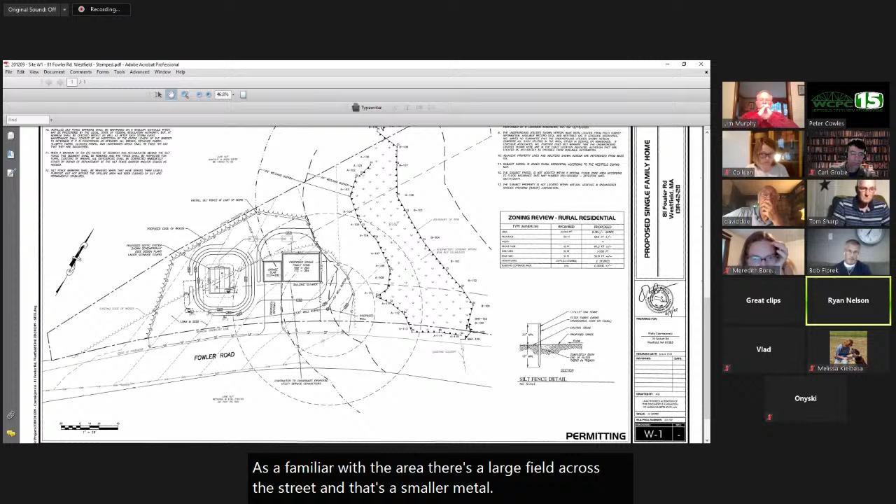This property is located north of Fowler Road. You guys are familiar with the area. There's a large field across the street and a smaller meadow, with this existing tree line shown here. They own a much larger parcel that continues on up to the east. There is a bordering vegetated wetland located on the property, with the boundary located here. There's an intermittent stream within this wetland that flows southerly and crosses Fowler Road.

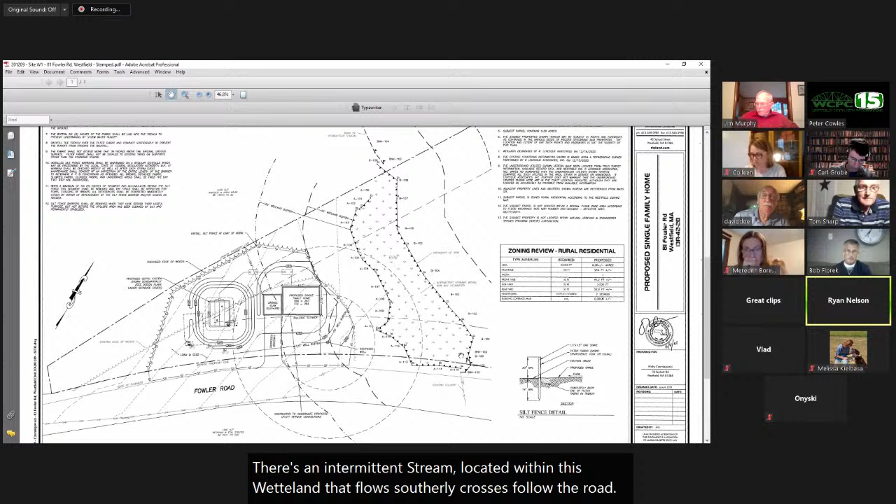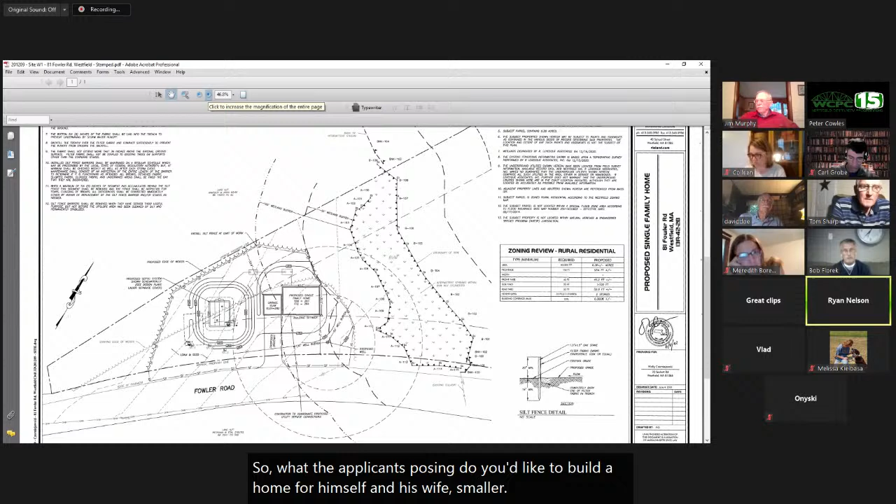The intermittent stream within the BVW hasn't been delineated, just not necessary in terms of buffer zones. Here is the 100-foot buffer zone shown extending from the wetlands. As I mentioned, this is the existing edge of the field. The applicant is proposing to build a home for himself and his wife, a smaller retirement home. The house will be located within this existing field. Due to groundwater and design constraints for setbacks for new construction of a septic system, it will be a pump septic system located here. There's going to be a driveway.

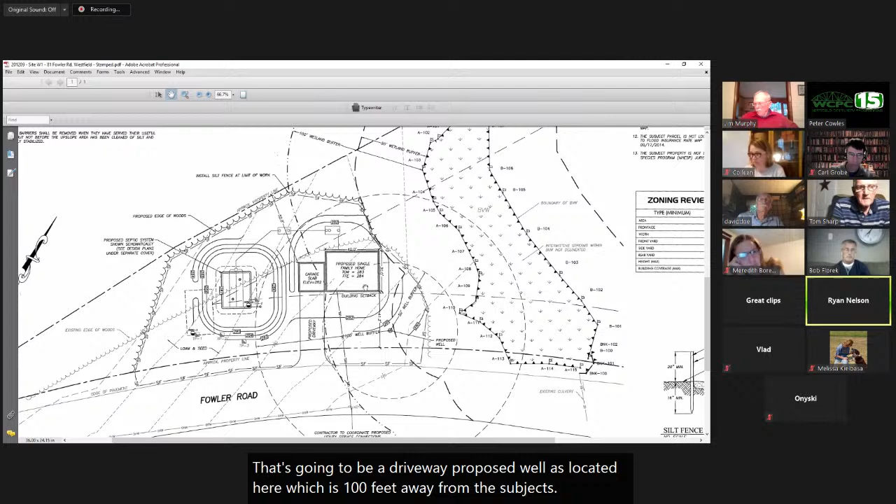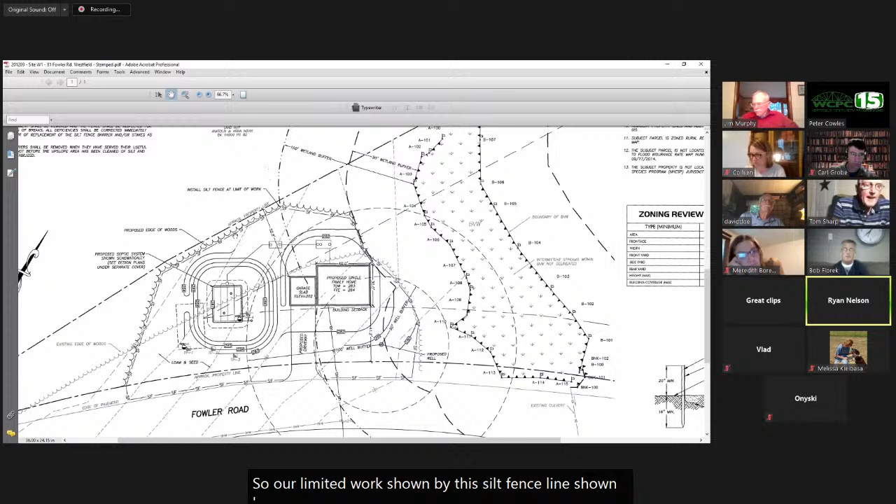The proposed well is located here, which is 100 feet away from the septic system. We are staying outside the 50-foot buffer zone, with the exception of an existing portion of the field here, which really won't be all that disturbed, just a little bit of site grading. In terms of clearing of vegetation, no work will take place within the 50-foot buffer zone. Our limit of work is shown by this silt fence line, which will encompass the project site.

Aside from that, it's a pretty simple layout, a small project, less than a quarter of an acre. We did have some comments from DEP. I can bring those up in one second.

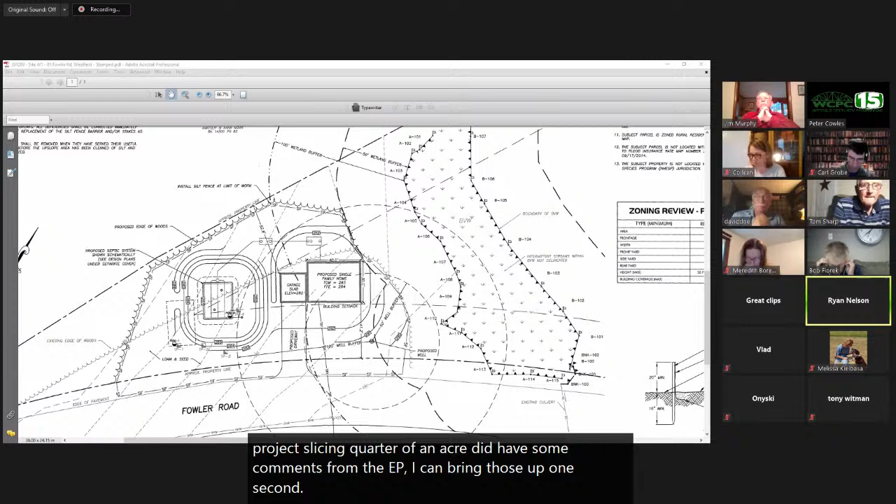We received comments from Mass DEP on June 15th for the project. Mr. Simpson's comment number one — let me share it here. Some aerial photos suggest the area southwest of the tree line is somewhat wet and tire ruts are seen, which may or may not constitute BVW. Is there a cross culvert under Fowler Road between this parcel and parcel 13R-45? The commission may certainly require wetland data sheets being included in any NOI application.

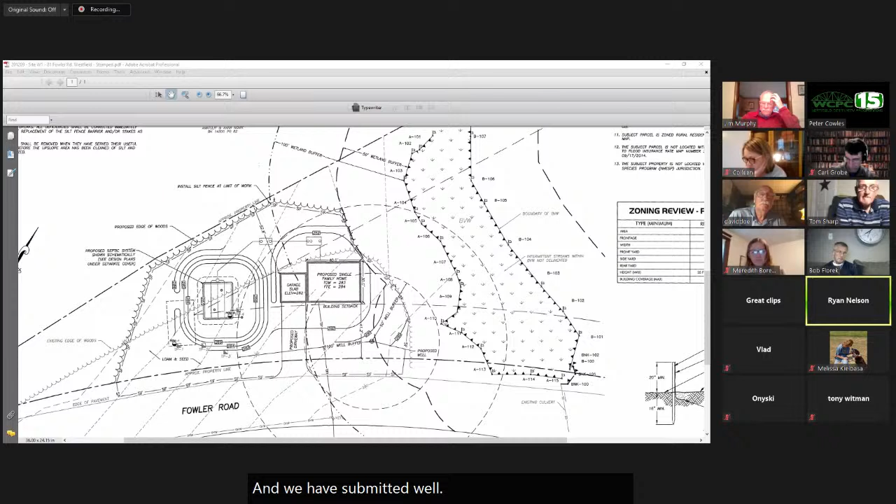So I kind of have an idea of where he's referring to. On aerial imagery, it looks like there's maybe a wet signature in this corner of the field. I did look at it — there's some sensitive fern there, but I didn't find hydric soils that would constitute it as a BVW. It's been a maintained hayfield for quite a few years, and we have submitted wetland determination data forms to the commission since his comment, which have supported that.

Ryan, when did you delineate? I delineated the property back in December of 2020, but I was out there again this spring during the perc testing, and I took a look at everything during full vegetated conditions, and everything remains the same.

The second comment from DEP was, according to MassGIS data, this parcel already has a single family home located upon it, and is this a new subdivided parcel not yet recorded?

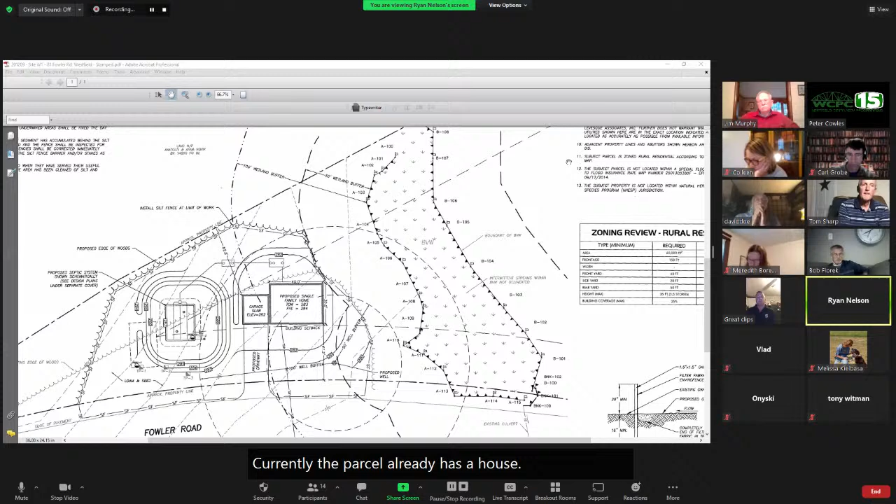So that is correct. Currently the parcel already has a house on it. It's actually the applicant's daughter's. But the intent is to ANR this property pending conservation approval. Didn't want to subdivide the lot before we got through conservation approval. But there's plenty of frontage. We've done a review, and this proposed lot would meet all the dimensional zoning regulations to be a new lot.

So those were the only two comments. I think I've hit upon all the key items. Happy to answer any questions you guys might have. Any questions from the commission?

It doesn't look like there's room for any further agricultural activity. Is that correct? That's correct. Yeah, there'd be no more haying of this field. The buildable area of this envelope is pretty much taken up by the house and the septic system.

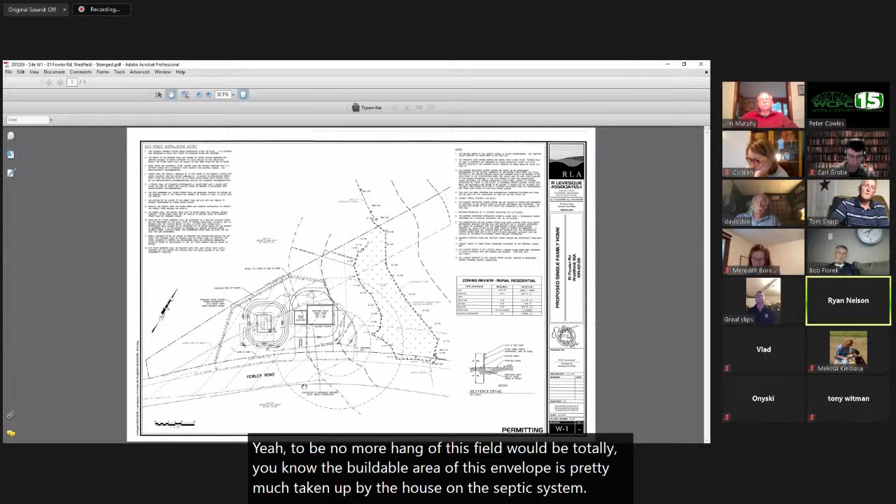Ryan, does the property owner understand that the 50-foot buffer will be a no-touch zone? Yes, yep, I've conveyed that to him.

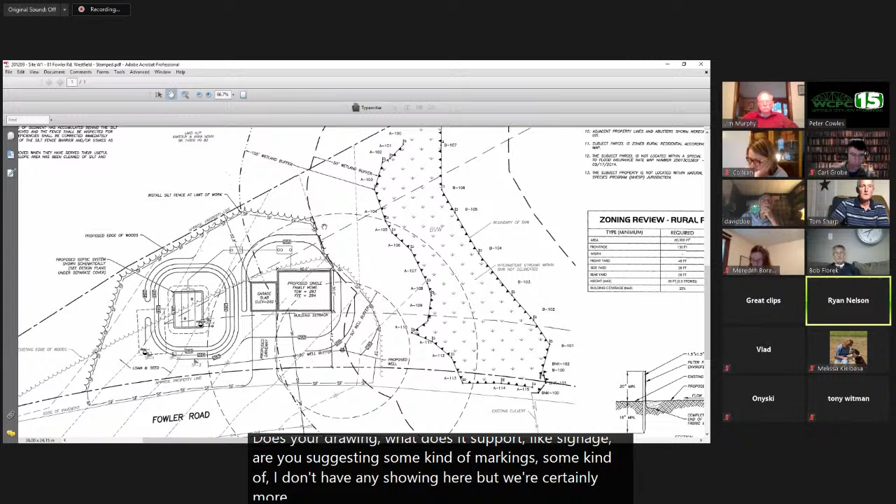Does your drawing support signage? Are you suggesting some kind of markings? I don't have any shown here, but we're certainly more than willing to show that. Yep, that's something we anticipated. I guess I'm absent-minded, I don't know why I didn't show it on the plan here. Okay, thank you.

Other questions? I had a quick question, if I may. Sure. Ryan, where does this proposed house lie relative to the existing house? Is it to the east?

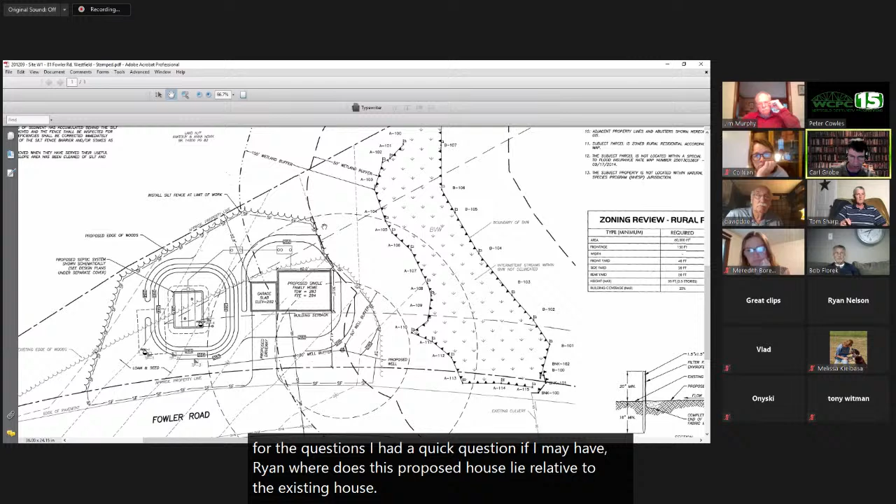Yes, let me pull up a different aerial so you guys can get a look. Ryan, just so you know, we didn't see an aerial you shared before, so I was hoping maybe you could show us. Oh, sure, okay. Yeah, it was just the site plan.

So this is the property right here. So there's an existing house here. In the future, the concept is that a lot line would come down somewhere in the middle here that would segregate the two parcels. And the area Mr. Simpson was referring to, you can see there's a wetland located in here. The culvert actually discharges within this hedgerow.

I took a look at this area here. You can see it's kind of wet, but this is also during the non-growing season in this aerial. I took some soil samples here. I didn't find any hydric soils, some sensitive fern, but there's also sensitive fern spread around the meadow. Mark showed us an aerial of some ruts or matted grass in this area. I can see why there'd be cause for concern, but this past week I did soil sampling all through that area and there's definite upland soils.

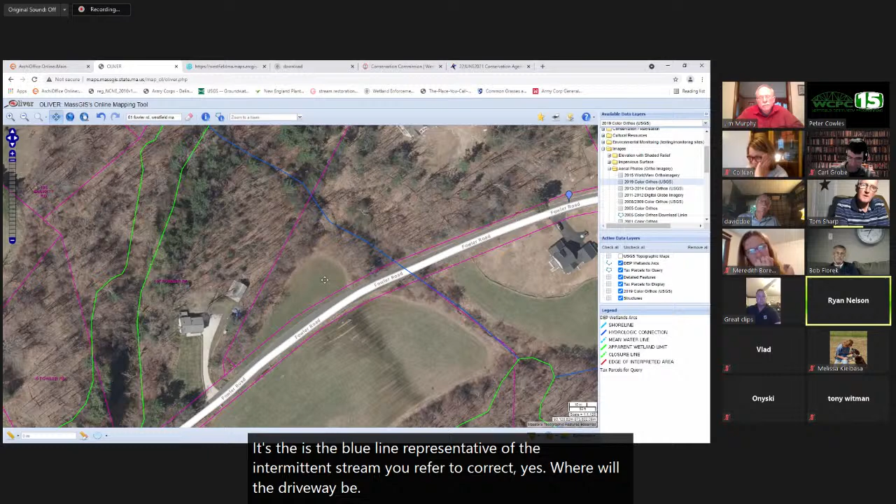Is the blue line representative of the intermittent stream you referred to? Correct, yes. Where will the driveway be? Right here, right about here.

And obviously plenty of frontage, but is there enough acreage? It's hard to tell. Yes. Let's see, I think I have a table here. The minimum lot area is 60,000 square feet, so there's more than enough. We would encompass a lot of this wetland area as part of the future parcel.

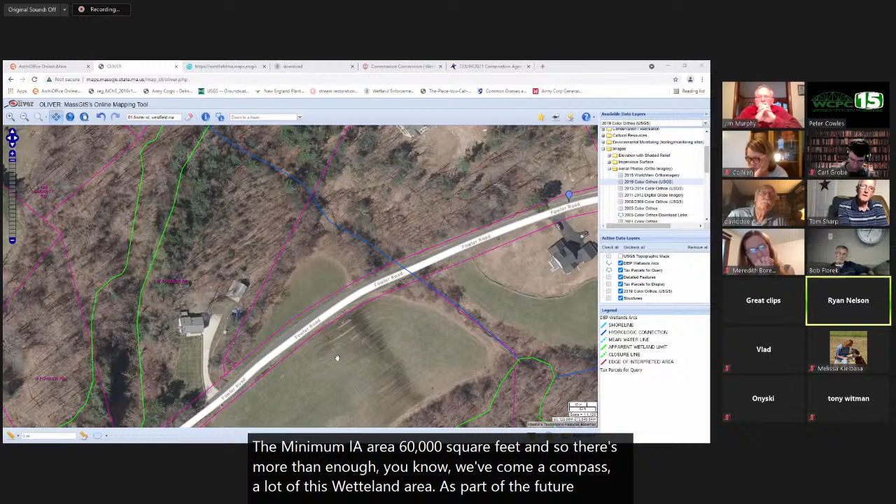Okay, thanks again. Other questions? Ryan, go ahead, Meredith. Oh, I just was wondering if you could, Ryan, show us what trees are going to be removed, sort of the tree line. Yep, sorry, on the aerial photo.

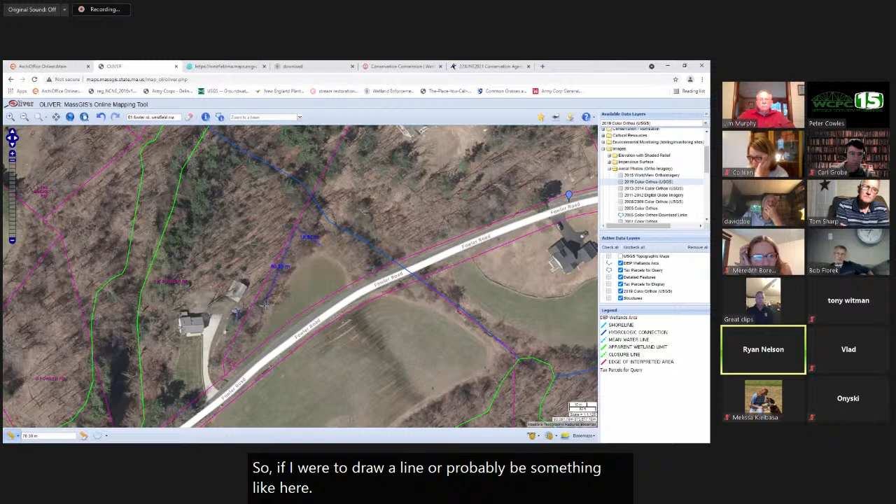So the 50-foot will remain. Maybe if you draw an imaginary line from about here, vegetation on this side of the stream would remain. And from this imaginary line, heading kind of southwest, about half of it would be cut to allow for the septic system and septic tank. So if I was to draw a line, it would probably be something like here to there, that would be cleared, this area here.

Okay, thank you. Yep.

Ryan, on your site map, it looked like the corner of the house was right at the 50-foot line. Is that correct? Let's see. Yep, we're a couple feet off that 50-foot line. But at that location, the house will be relatively on grade, so we're not anticipating any site grading to occur around that corner of the house.

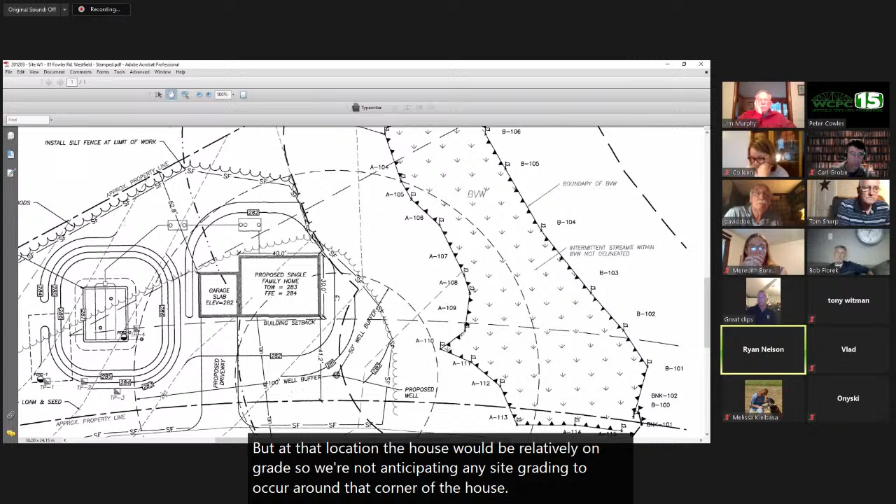So your silt fence is really right on the 50-foot or really close to it? It's a couple feet beyond the 50-foot inside it, but it's staying within the existing meadow in that area. So it's grass now and it will remain grass. Okay, so they're looking to mow it? Yes.

Other questions? Do we need a site visit? Yeah, I had a very quick question if I could, from Ryan. Where's the 100-foot buffer then? Is that the double line there? Yep. Okay, all right.

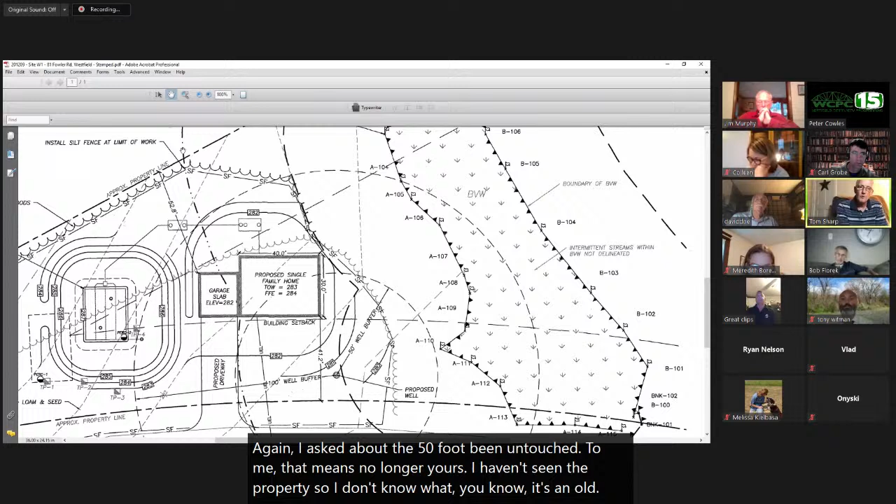Thanks, I was all happy with this until you mentioned mowing. Again, I asked about the 50-foot being untouched. To me, that means no lawnmowers. I haven't seen the property, so I don't know, is it an old cornfield? Is that what you're implying? It's a hayfield, so it's mowed several times a year now. But in the future, it'll be maintained as a pretty lawn with fertilizer and all that good stuff.

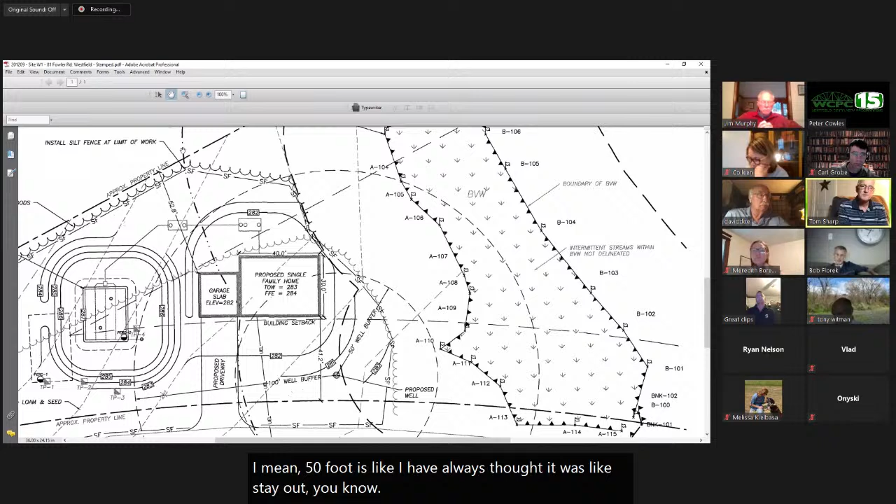Yeah, that's probably true. I'm just trying to think, commissioners, have we done this before? I mean, 50-foot is like, I've always thought it was stay out, especially on something new, especially on a new project like this. I was thinking your signs would go right on the 50-foot marker. Do not disturb, but if the owner is going to be in there with lawnmowers, clearly that will be disturbed. I see what you're saying, Tom. I do, I guess it's a gray area of it's mowed now, and what constitutes, at what point is mowing more detrimental in frequency? I don't know.

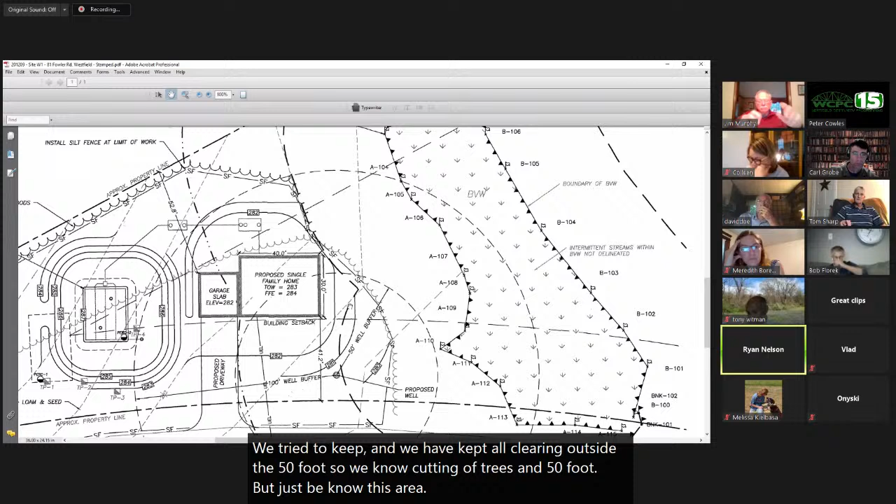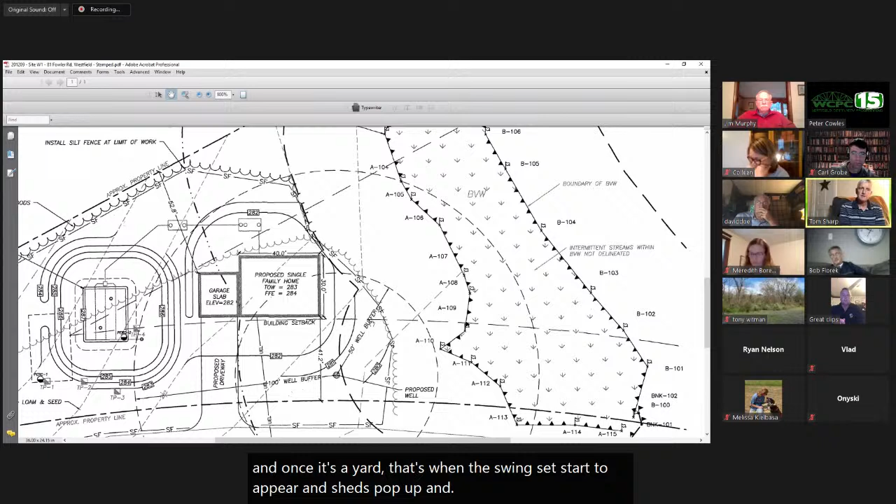We tried to keep, and we have kept, all clearing outside the 50 foot. So there'll be no cutting of trees within the 50 foot. It would just be this area within the wedge between the existing tree line and the 50-foot buffer that would be mowed more frequently. Tom's point is a good one though, in that that was formerly agricultural use, and this is changed to making it a yard. And once it's a yard, that's when swing sets start to appear and sheds pop up. I just think we have to be a little careful with our buffer zone.

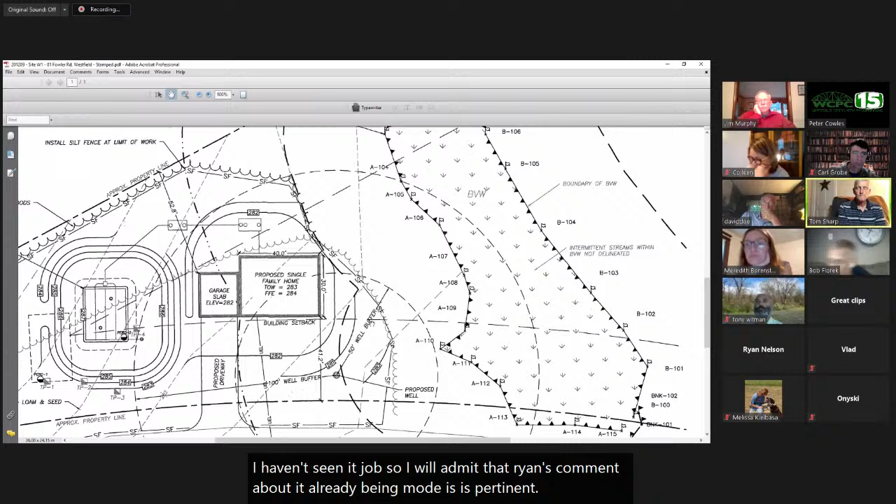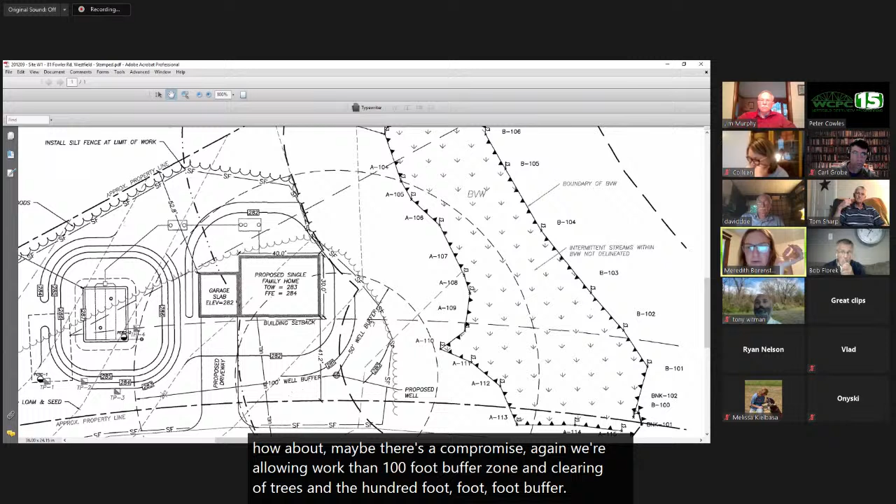Tom, what are you proposing as an alternative? I haven't seen it, Jim. So I will admit that Ryan's comment about it already being mowed is pertinent. I don't know, I'm looking for help here. I'm not sure how. Maybe there's a compromise, like we're allowing work within the 100-foot buffer zone and clearing of trees in the 100-foot buffer zone. Maybe the 50-foot could be marked. And in perpetuity, maybe we could get some plantings. And maybe it doesn't have to be signage because this is going to be somebody's home, but trees.

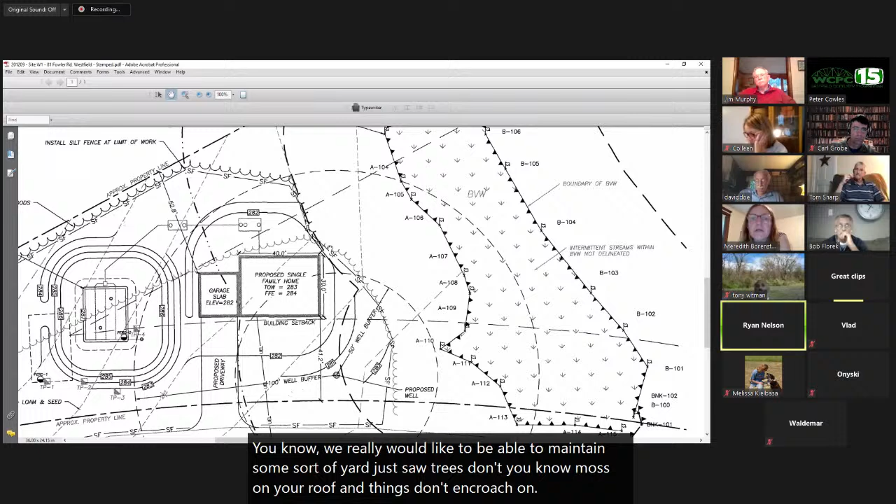Yeah, I think our greatest area of concern is this back corner of the home. We really would like to be able to maintain some sort of yard just so trees don't, you know, moss on your roof and things don't encroach on your house. But we'd certainly be willing to compromise elsewhere if we can think of some ideas. I think a site visit probably is necessary so we can see how close we are to the buffer zone and what the effect of the mowing actually is out there. I agree.

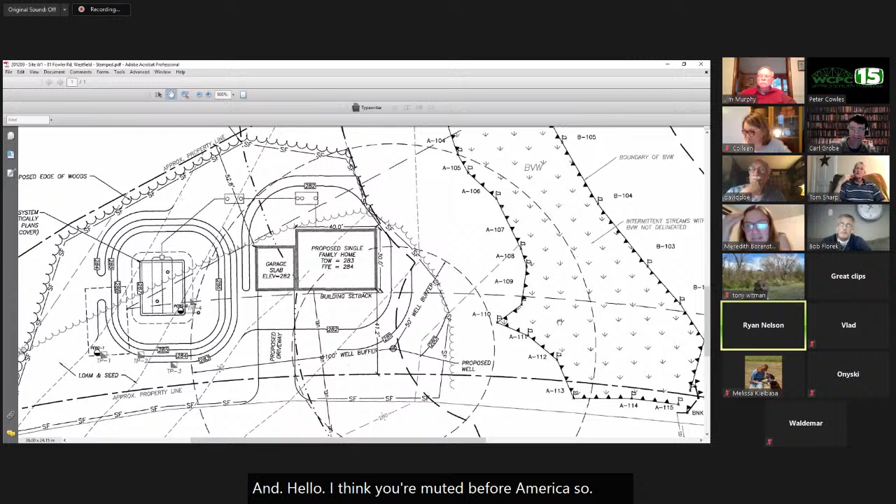Did anyone hear my comment about the cutting of trees long-term? And hello, I think you were muted before, Meredith. Oh. One more question, was RLA able to maximize the field portion of the property and try to locate the work outside of, as much as possible outside of the 100-foot buffer zone?

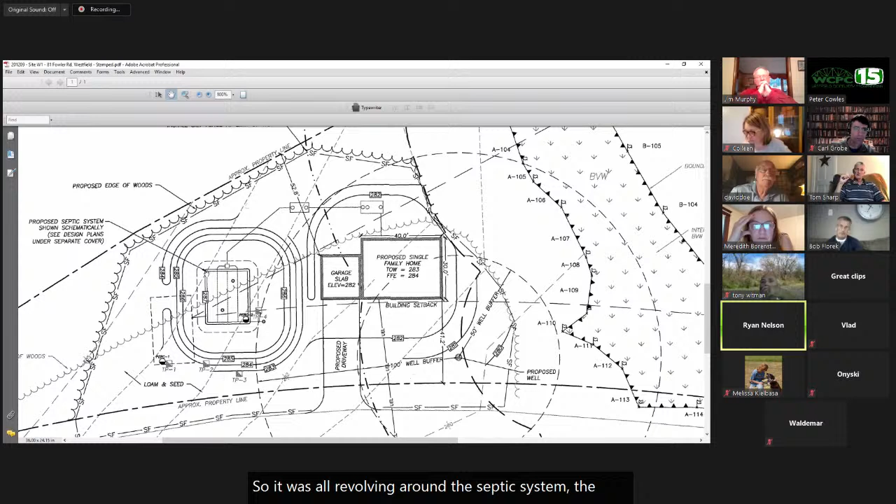Yes, so I'll give you the reasons or the constraints we had. It was all revolving around the septic system. The septic has to be 10 feet from the property line. It's a mounded system, so we had to keep the side slope grading on our property. The well has to be 100 feet from the septic system, and the house is right up against the setback. We couldn't shift the house any more left without encroaching on the septic area.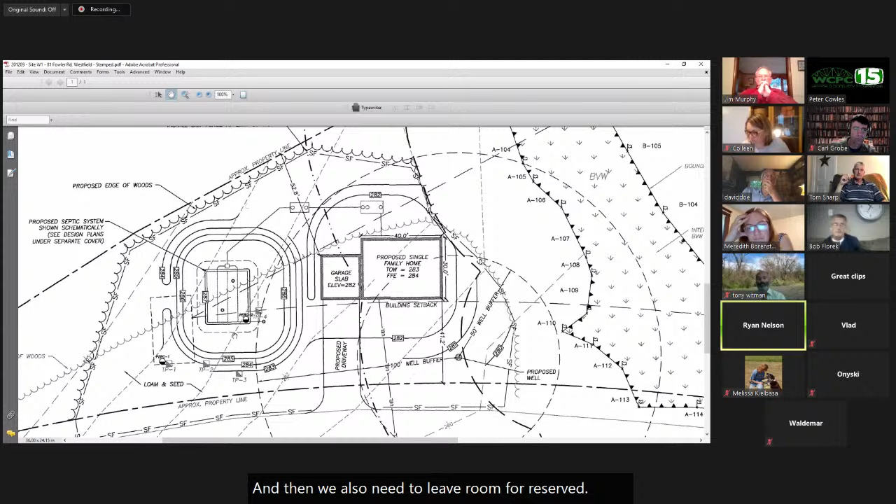And then we also need to leave room for a reserve perk, under Title V, for a future septic system in case this one fails. So we couldn't push everything over to the left because then we wouldn't have room for a perk for a reserve area. You can't have a septic system within the 50-foot buffer zone, which limited us from having a reserve over here. So it had to stay on the upland side. We've shifted everything down to the left as much as we can.

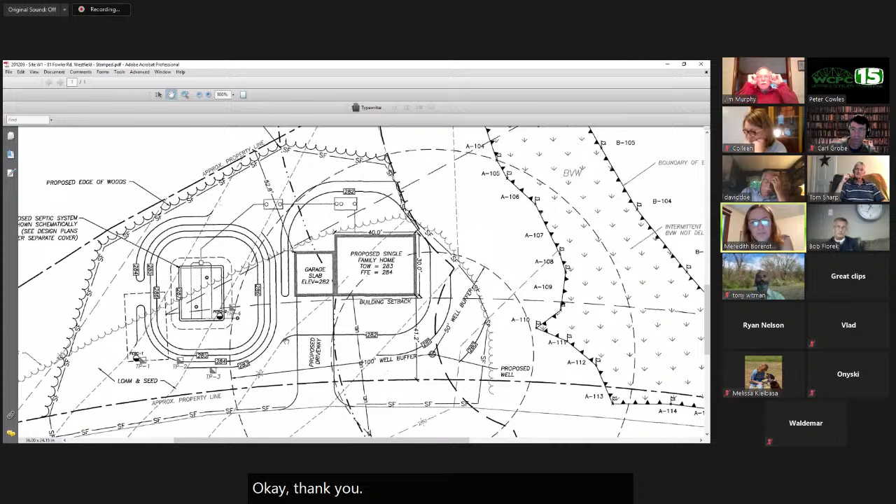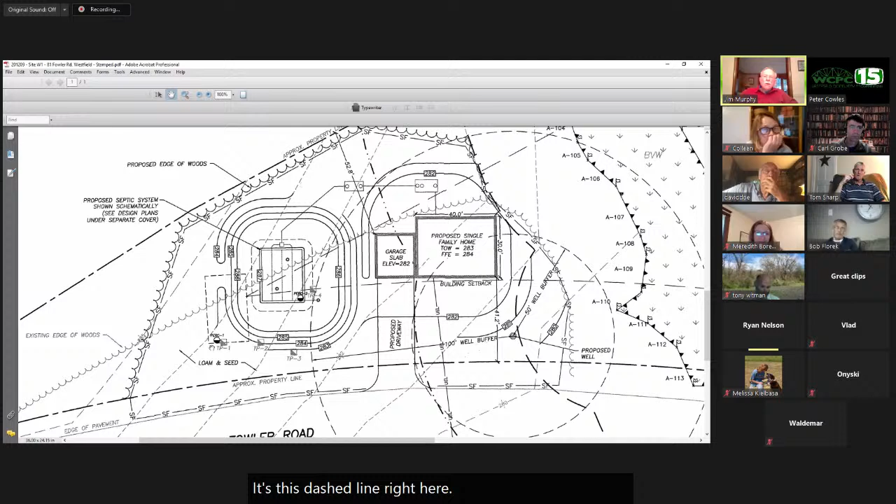Okay, thank you. I have a question for Ryan regarding the reserve. Could you explain a little bit? I'm looking at the primary location, and this is a raised mound, as you said. So where would the reserve go? It's this dashed line right here, just an approximate area. We also have to keep in mind this has to be at least 100 feet away from the neighboring well, which it is, which is why we can't move it any more to the left either.

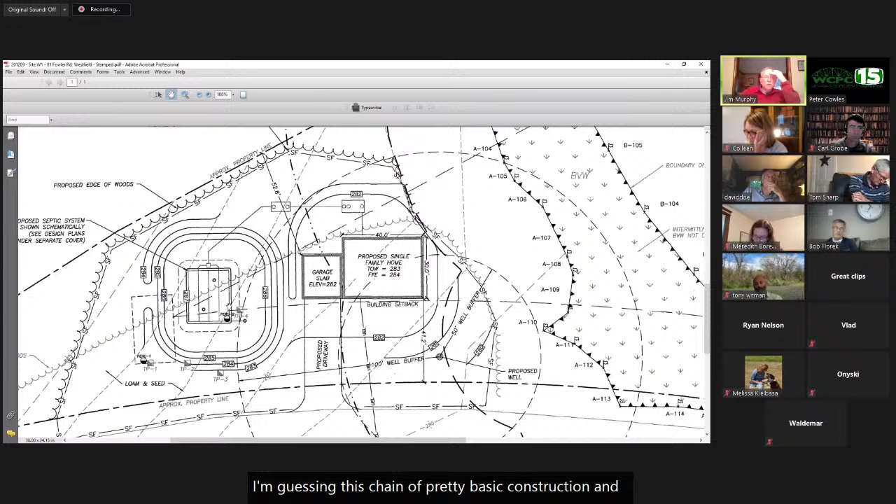So when a reserve has to be done in a mounded system, I'm guessing that's pretty invasive construction-wise, because you've got to change the contour of the mounds. Is that correct? That's correct. This provision is set forth for 40, 50 years long-term down the road. This would probably have to be left in place, abandoned or removed, but you'd have to construct a new one at the proper grade, mounded and elevated around the new reserve perk area.

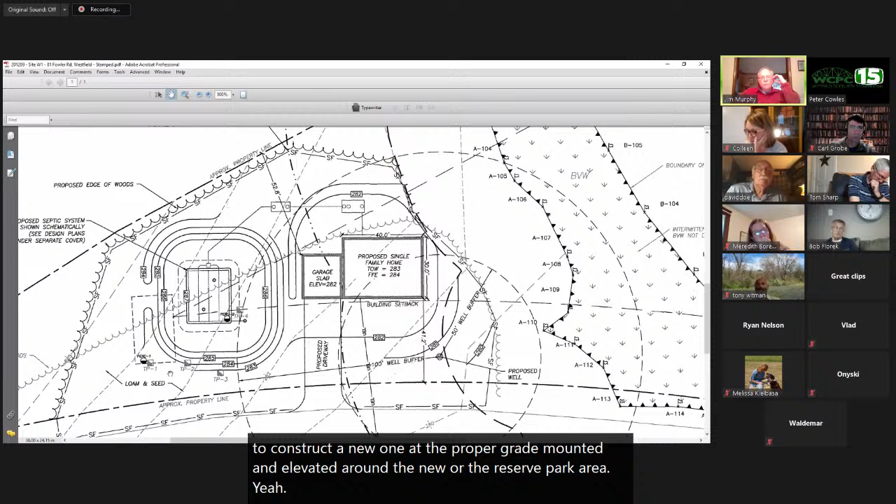All right, thank you. Okay, other questions? Just one last one, Mr. Chairman. Sure. Ryan, the DEP comment about a cross culvert under Fowler Road - number one, does one exist? And number two, why is Mark asking that?

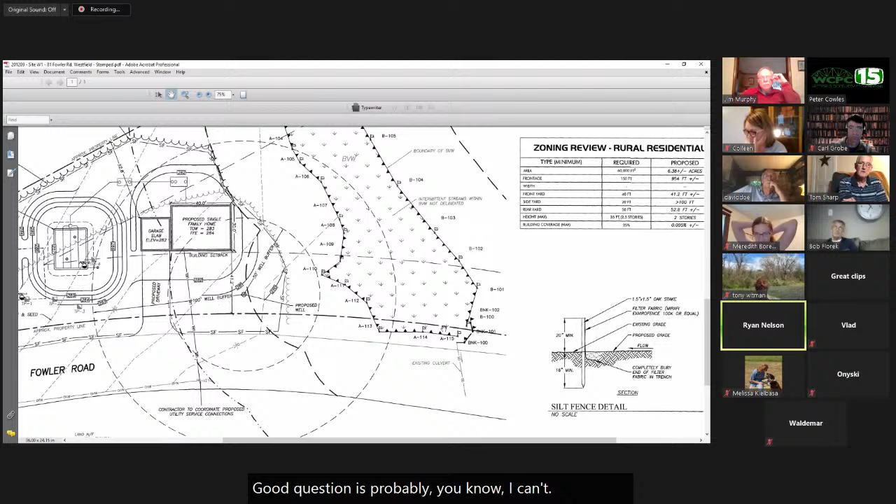Good question. He's probably, I can't put words in his mouth, but maybe speculating if this area is impounded and maybe backs up, or if it has some sort of relief. I'm not sure, but yes, there is a culvert located under Fowler Road right here. So is that culvert active? Yes. The stream is flowing. Both times I've been out there, it's been flowing.

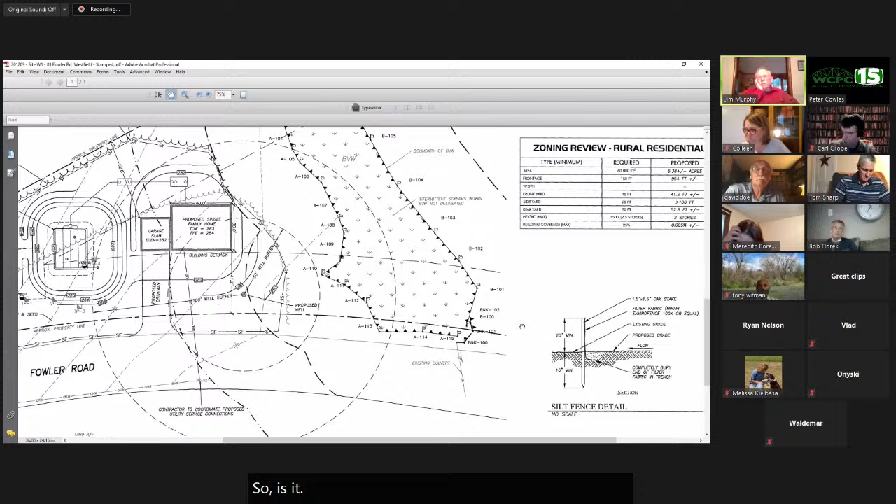So where the resource area, the stream, where is that receiving its water? Is it sheet flow, or is that creating the little stream, the intermittent? Can you talk more about the hydraulics of that area so we can get an understanding of where it fits in? Sure.

It's hard to see, but this house here is up on a large hill, probably 30, 40, maybe more feet above this wetland system. And you can see this stream starts farther up and snakes down. So it is fed from sheet flow, and also I think groundwater discharge from the base of this hill. This whole wetland area is pretty saturated both times I was out there. And then there's also a contributing area farther down Fowler Road, connected to other wetlands and stream systems that all flow in this direction.

Okay, thank you. Yeah, let's set up a visit, Mr. Chairman. Sure. And Ryan, could you actually put stakes at the corners of the house? Yep, absolutely, no problem. So we can see how close they are to the 50-foot buffer. Sure, we'll have that staked out with the buffer zones and everything to make it clear. Oh, that's great. Thank you.

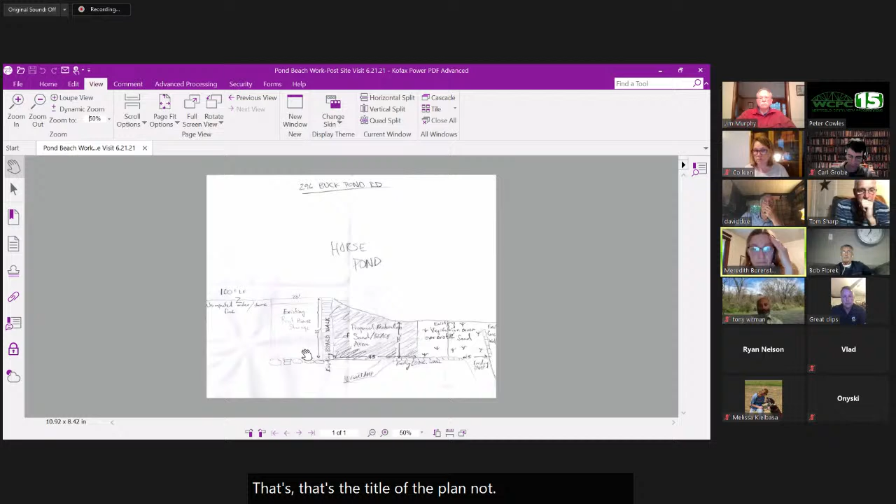Their house is over here on this side of the pond. This is the pond, that's the title of the plan, not the location of the road. So Horse Pond is here. They're asking to put a small beach, 45 feet long by 14 feet wide, between an existing boathouse, and there's kind of a walkway coming down.

Yeah, I mean it didn't sound too bad. So I think this is a good representation of what's out there. A couple, oh sorry, were you guys, do you want to keep looking at that, Tom? No, no, I recall it. Thank you, okay, yes, you were there. I think you were out there a while ago. I did just visit this site earlier.

Yes, let me just share a photo or two here. So about half of this area would be beach sand, and you can see it was a sandy beach at some point, but I believe the property wasn't maintained for quite some time. The homeowner is welcome to chime in, but let me just scroll through.

So there's an existing boathouse, the sandy beach has become revegetated, and about half of this vegetated area would be sand. I did confirm that it's going to be clean sand, not silty sand, so it shouldn't add any turbidity to the water over time. This is an existing walkway down from their house that would go to the sandy area.

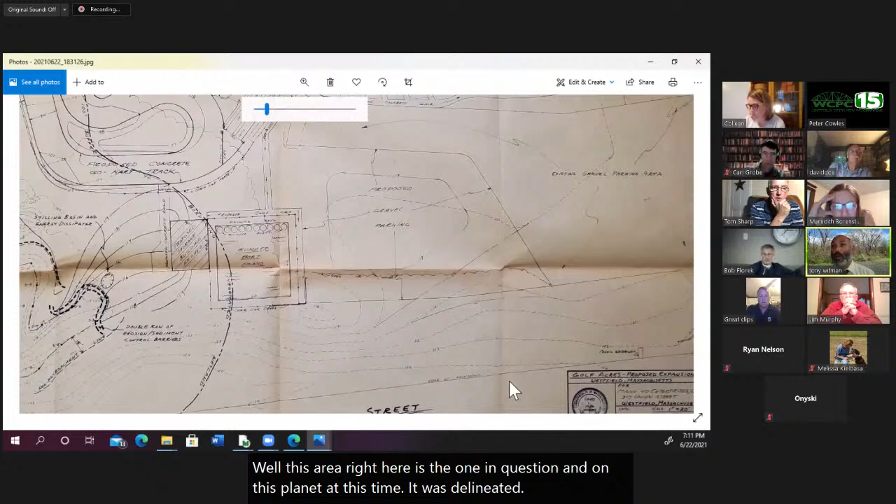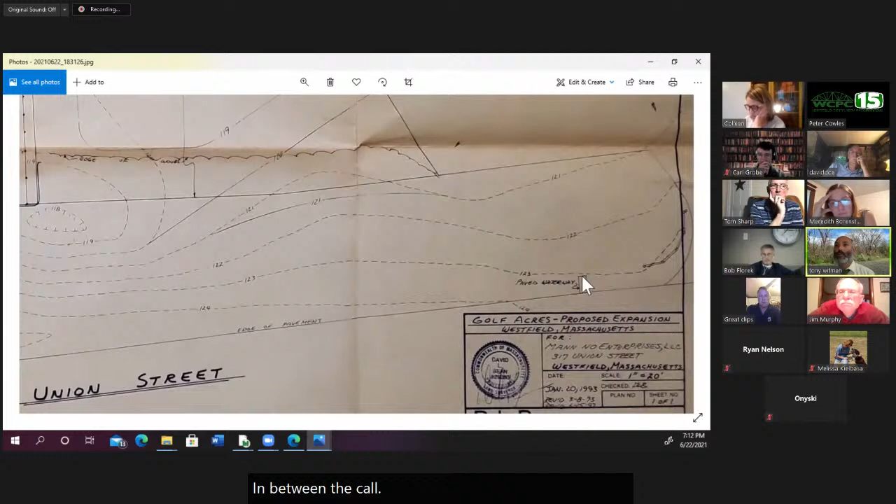So this area right here is the one in question. On this plan at this time, it was delineated or described as a paved waterway, so I think at one time there was a little bit of asphalt between the two culverts. You could feel some of that hardness poking down into the area, but there's also quite a bit of silt that's collected on top of it. This is the area right here at the corner of the driveway, between the two culverts, at which point the water goes under the parking lot, presumably exiting somewhere in the pond.

Tony, so from that culvert, which is the entrance, we're talking to the left of the entrance. How far up did you want to clear going up? Up to like where the guardrail starts?

Let me see if we can- probably about right in front of the go-karts, about there. If you could see this map, it would start at this point where that culvert is, and we want to go down to approximately perpendicular with the pit house of the go-kart.

Just so everybody knows, right about where he's talking is where the guardrail starts. It goes all the way, wraps around down to the corner. So that whole front, that top part is exactly like that, right? There's the pit house there.

I'm not... let's see, the guardrail's up further. Okay, never mind. So along this side of the parcel, here's the guardrail, and that's where the wetlands get a little bit closer to the street.